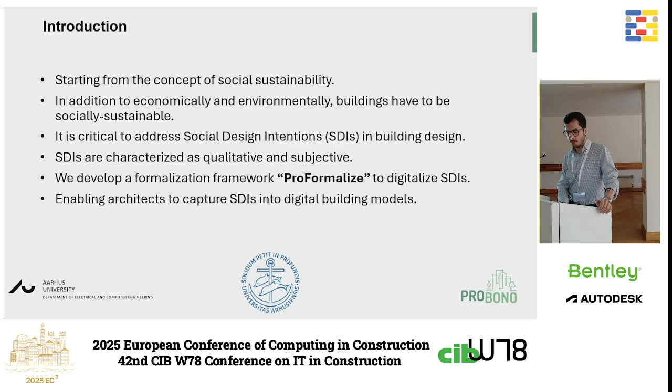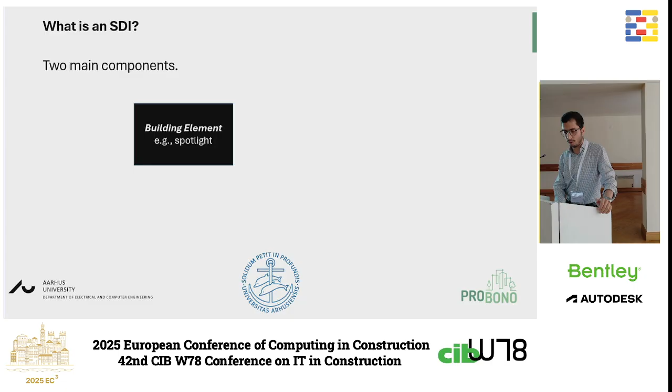So we develop a formalization framework, ProFormalize, to digitalize SDIs. And this will eventually enable architects to capture those social design intentions into digital building models. But what is an SDI? It has two main components. The first one is the building element itself. Example of that can be a spotlight. And it has a social aspect that we want to evoke in the built environment. And that could be, for example, something like sense of curiosity in the building.

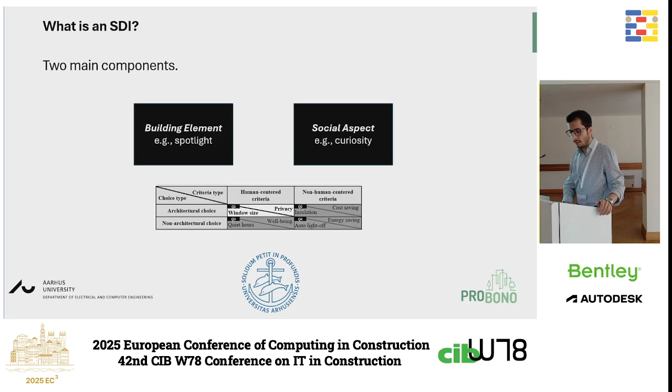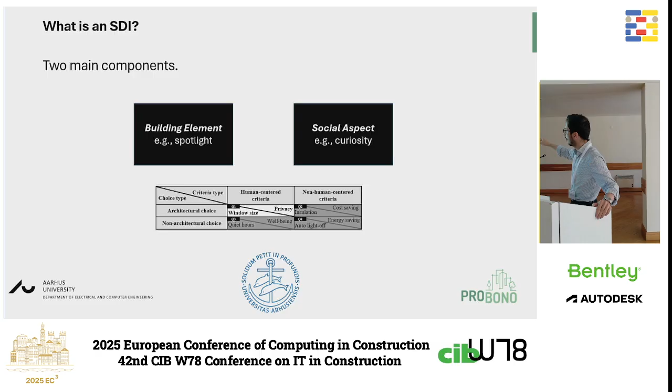And here, you can see the scope of our project, where the white box resembles architectural choice, something like window size, and human-centered criteria, something like privacy. If it's non-architectural or non-human-centered, then it's out of the scope of our work. Something could be about facility management, something about cost reduction. This is out of the scope of this tool.

The core of this framework is what we call the product goal causality model, which has three levels: the product level representing the building element, the domain level representing the sensory experience. In this case, if it's light, then it should be a visible space, and the goal level representing the social intention, which is curiosity.

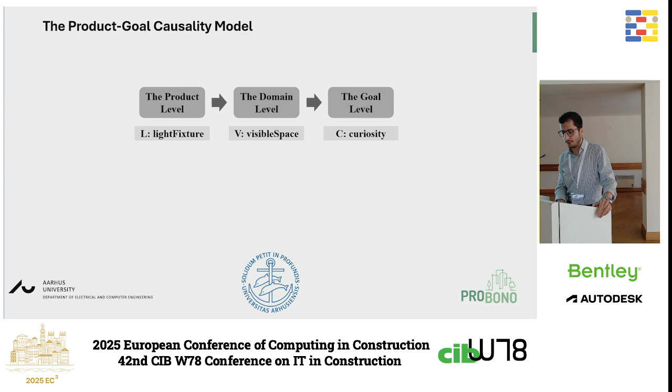We developed this tool following a co-creation methodology that is involving potential users of the tool in the research and development process. We started with doing analysis of the users, of the purpose of the tool, which in our case is social design intentions in the built environment. And then we moved to the research design stage, where we thought about how the workflow of capturing such social design intentions should be.

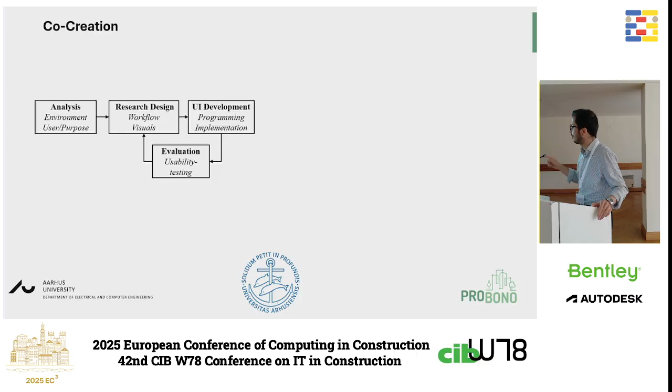And then we moved to developing the user interface for the users to capture SDIs. And then there is a cycle of evaluation, usability testing with potential users. Those potential users can be architects, academics, students in architecture or civil engineering, and so on.

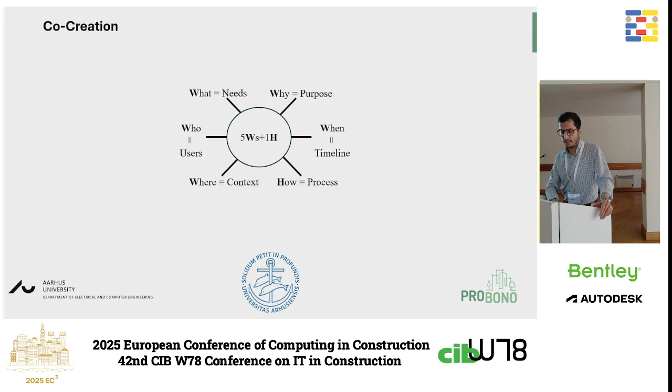The co-creation process answers those 6 questions. What are the needs? What is the purpose? It's all about capturing social design intentions. So the purpose was that there is a lack of software tools that capture such intentions, and those intentions might end up being lost in the life cycle of the project.

When? This could be during the planning early stage phase or during the renovation. Who can use it? As we said, architects and facility managers. How? It's a user-centered system based on the co-creation methodology that we are following, and the context is always socially oriented.

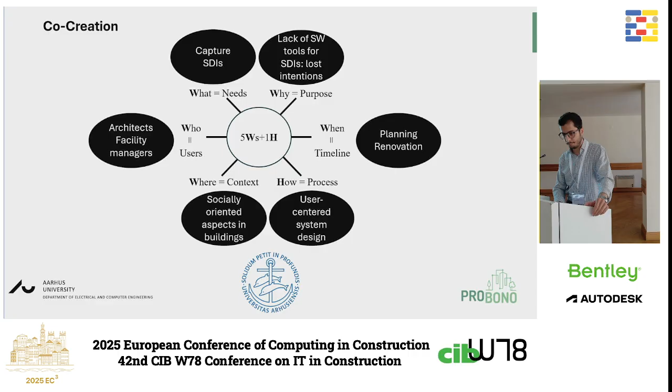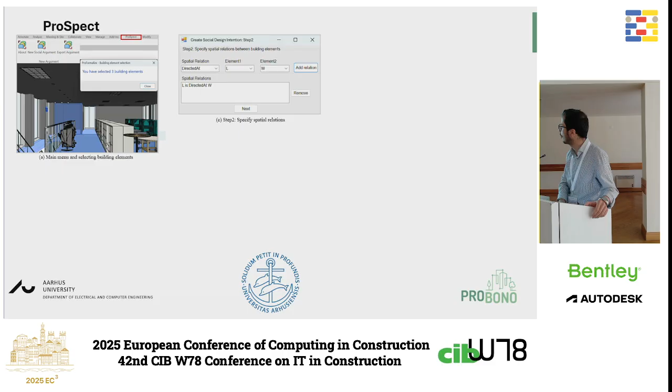So we developed the Prospect software tool, a plugin. The first step is you open a Revit session, you select the building elements that are involved. In this case, we have selected 3 building elements. That's the spotlight on the left part of the picture, the wall, and the floor where people can move. The next step is to define the spatial relation. We want the spotlight to be directed at the wall, so we can say L is directed at W.

Next, we define the domain level elements. We have an occupant, O, and then we define the movement space of the slab, the light space of the light, and the visible space of that light. And then we are interested in the intersection between where this light can be seen and where people can move. And in that intersection, we argue that the curiosity is evoked.

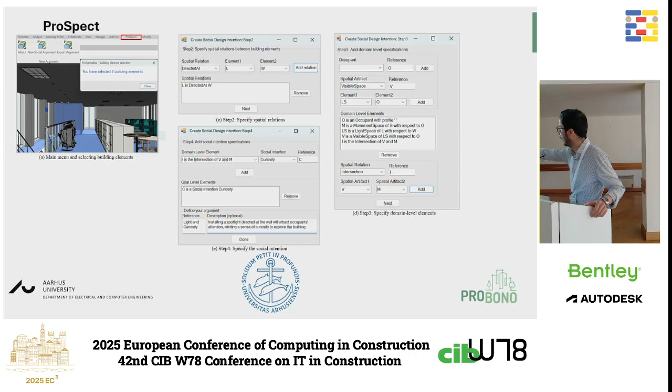And the last step, 4, is to define the social intention, which is curiosity. You can also give this SDI a reference, and a short natural language description. The output is a text file presenting all the elements that I mentioned, the product level elements, the domain level elements, and the goal level. You can see also the GUIDs of the building elements that we selected are captured.

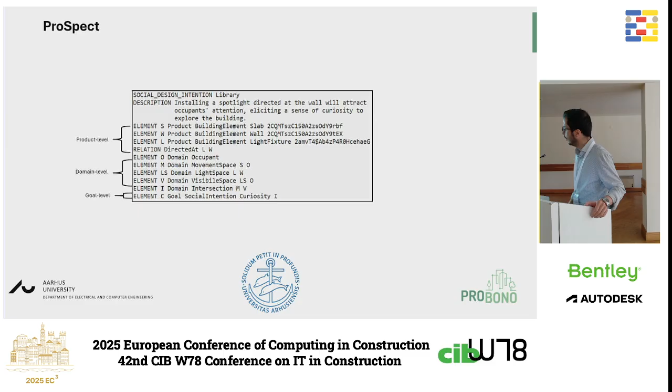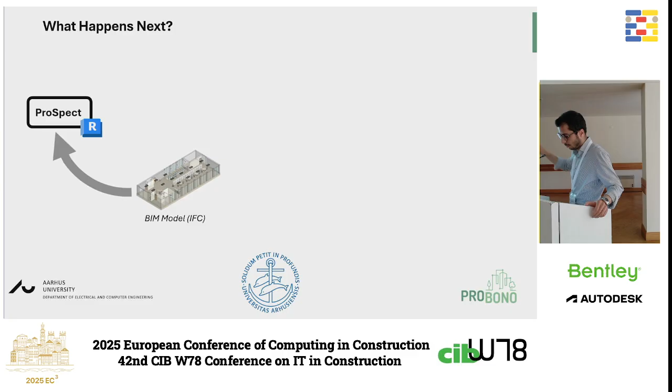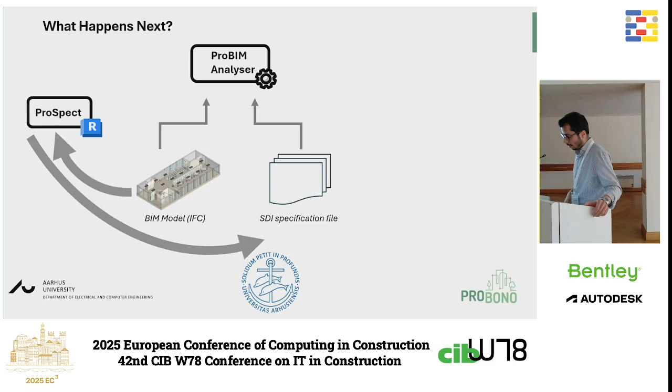And then the next step, what can we do with this text file? So as we said, we open the IFC file in a Revit session, and using the Prospect plugin, we select the building elements and generate the SDI text file. And then we can use both the IFC file and SDI file in our ProBIM analyzer, which is Python code that we developed that takes the IFC and the text file, and it generates a ProBIM model, a new IFC model containing the social design intention.

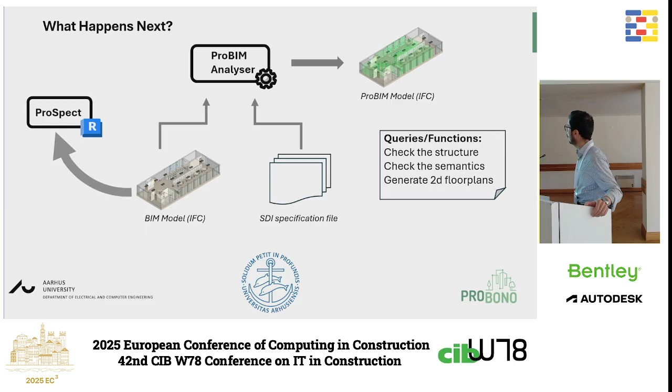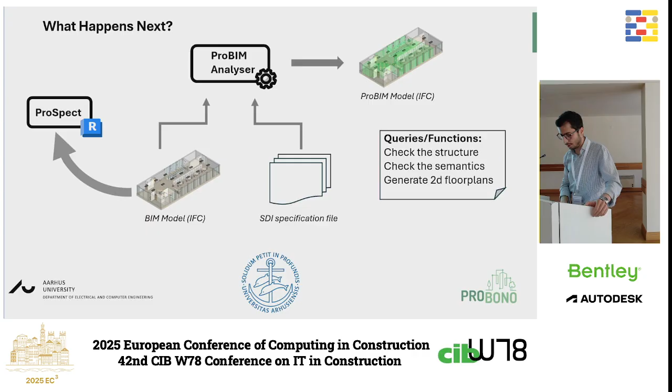What you can do with that ProBIM model, you can query it. It has functions that are predefined. You can check the structure if there are any violations, if there is any GUID missing, if there is any building element that doesn't connect to a social design intention. You can also check the semantics. You can generate 2D floor plans, or you can also draw the polygons where those social design intentions are in the building.

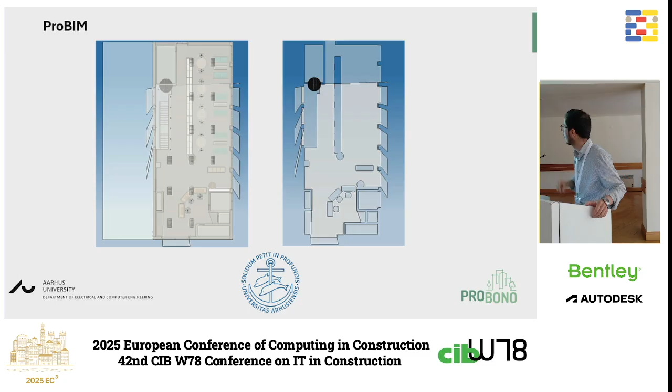The ProBIM model is a 3D model. This is a screenshot from an IFC viewer. You can here see the region where curiosity is elicited. That's the part of the floor plan where curiosity is elicited, the green area. And you can also use the file browser to get to that social design intention.

The future work, which has already started, is how we can use a large language model to produce those specification files, because in some of the rounds of the co-creation we got the feedback that architects don't like to perform a lot of clicks or a lot of steps to generate this SDI text file, and since it's a text file, maybe we can give a large language model a natural description of the social design intention and an IFC file, and then it can generate the text file that we want.